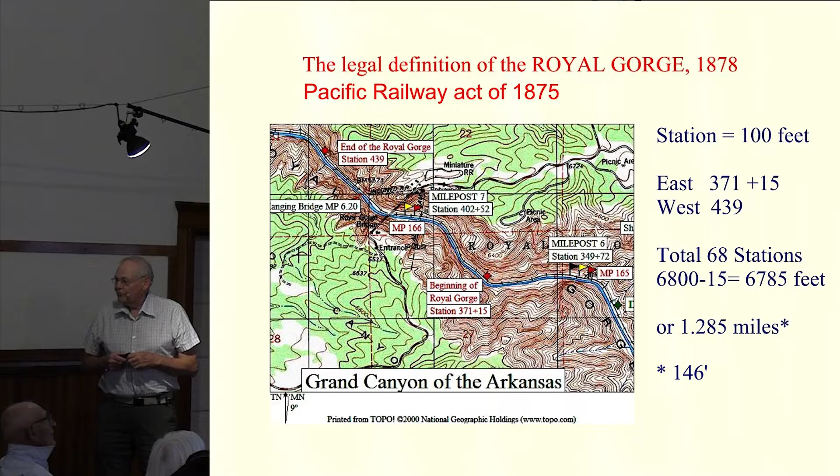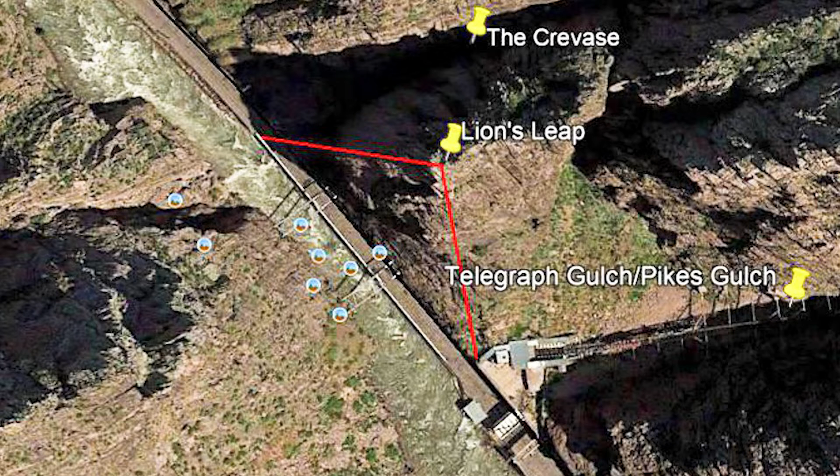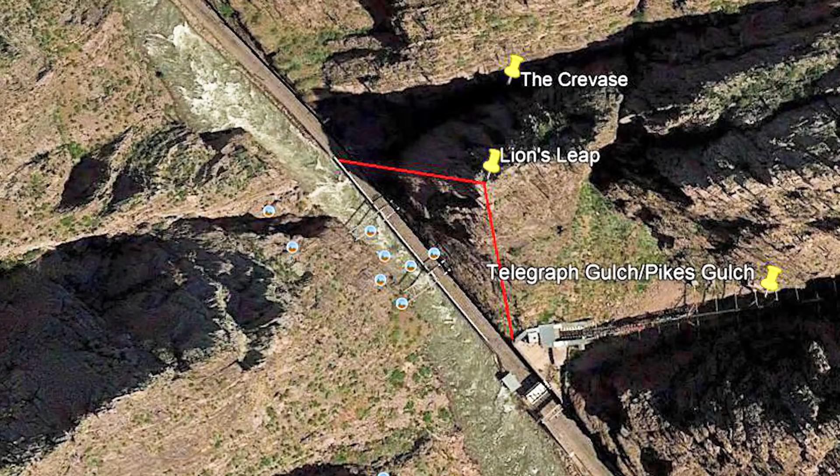An overhead view looking straight down. We're going to look at a section that's about 300 feet long. On the east side, or downstream side, is what everyone called Telegraph Gulch, but I understand now everybody's pushing to use it as Pike's Gulch because apparently he climbed up out of the canyon at that location. On the west end is the crevasse, or Bigler's Gulch, which we'll take a look at here. In between, the high point, which is about 500 feet above river level, is called Lion's Leap. This is Lion's Leap looking from the ground up.

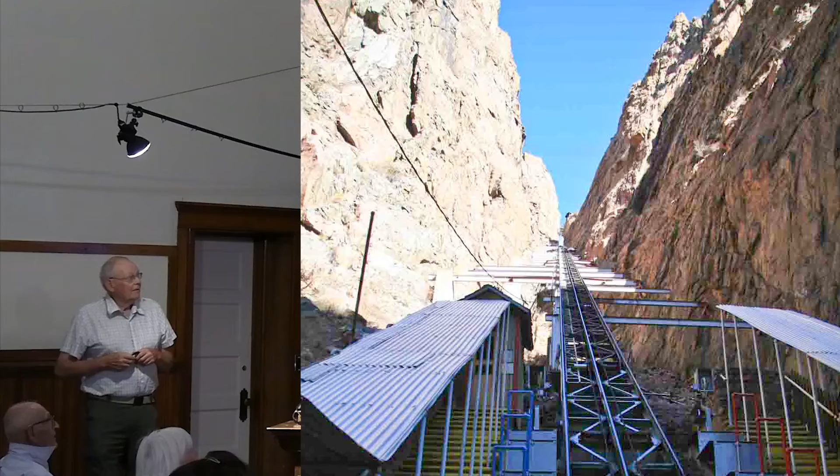Here's what Telegraph Gulch looked like before the fire, with the funicular railroad that was there. That, of course, was the easiest way to get to the hanging bridge. Of course, now it's not possible to do that. This is Bigler's Gulch on the west side. It is actually a natural fault line that runs through the area.

This is what that section looked like in 1879. At that time, it was possible to get into the east end of the canyon and the west end of the canyon, but you couldn't pass through because of this rock formation in the middle. There was one time of the year the passage was possible - that was in the winter. You could walk across the ice if you were brave.

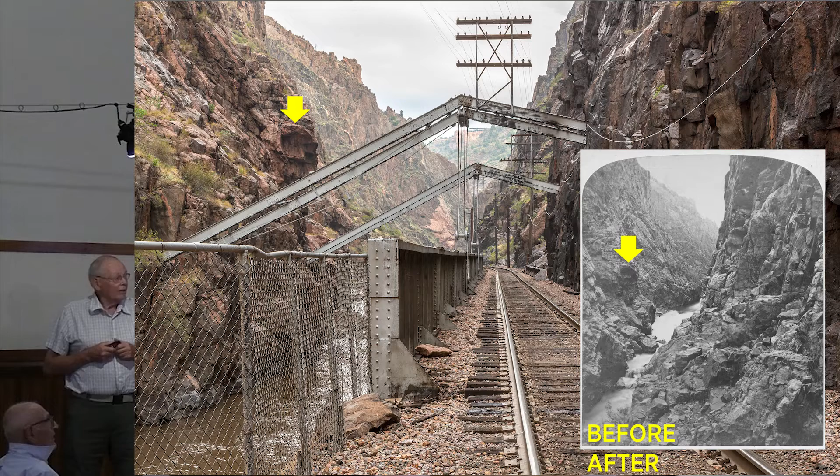And this is an image that Eve put together that I'm sharing with you. You can see the two comparison points of where the rail line is today and where the rock was in the past.

In the winter of 1878, a number of individuals made their way into the gorge to take a look at it. We know that one of them was A.A. Robinson, the chief engineer of the Santa Fe Railroad. Another was C. Shaler Smith, a very noted bridge designer and contractor at the time. We believe Chalmers Talbot also accompanied them and took stereo photographs of the trip.

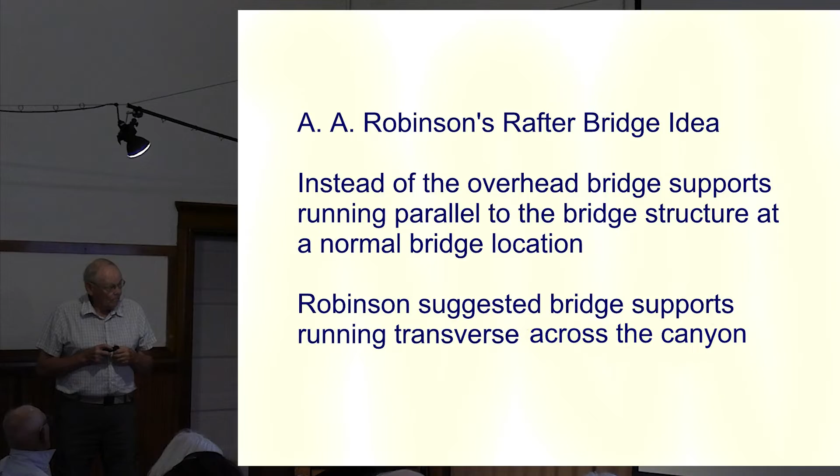Smith took Robinson's ideas, returned to his office in St. Louis, and worked up the plans for a rafter bridge. They were submitted to Robinson, who enthusiastically accepted the plans and offered what is known as a turnkey contract for the bridge. A turnkey contract includes fabrication, delivery of the materials, erection of the bridge, the labor to put it together, and the inspection when the bridge is done, to be turned over to the company.

Now, one might ask, why didn't the Santa Fe engineers work on this bridge? The answer is quite simple: this is the first iron bridge ever built on the Santa Fe Railroad. None of the very qualified men Robinson had working for him had any experience working with iron. All the bridges between Topeka, Kansas and Pueblo, Colorado were wooden trestles. So they went to an expert.

This is an example of Smith's work on the right-hand side. He designed some spectacular bridges, and there are a couple locally you can still go see. The Spider Bridge on Glorieta Pass is a long walk to get to, but the Cascade and Lobato trestles on the Cumbres and Toltec are easy to go see, and he was responsible for them. Smith also designed bridges in Australia and Peru. He's better known than we know him, I guess is what it comes down to.

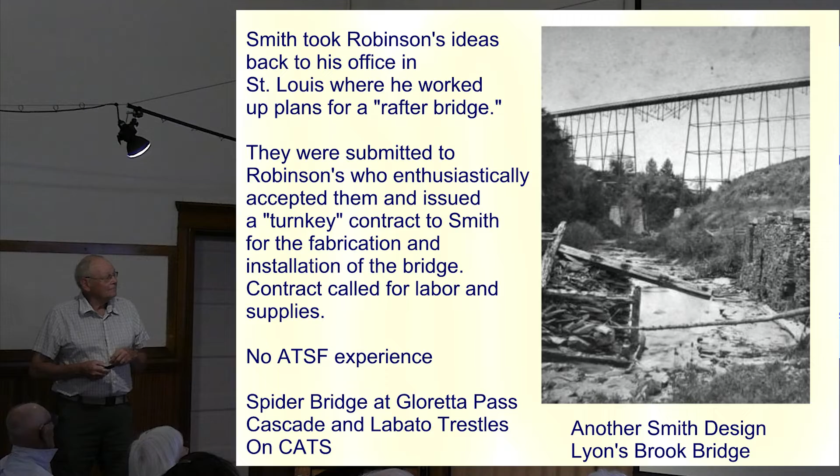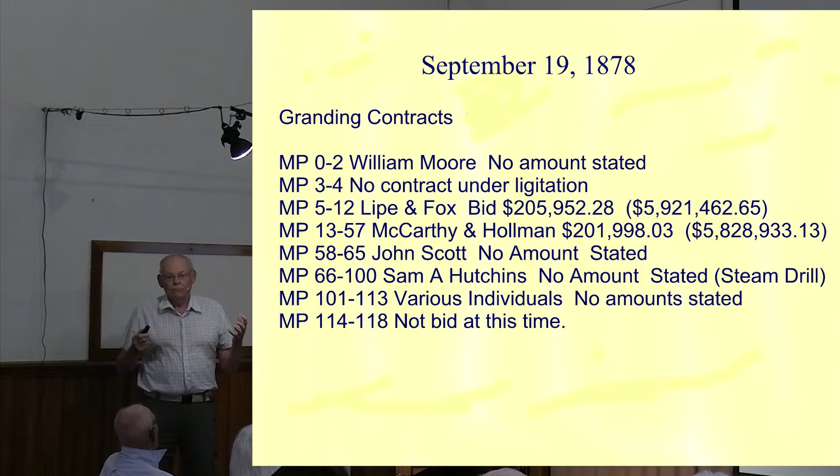One other individual we ought to mention is Sam A. Hutchins. Sam Hutchins was a contractor for the Denver and Rio Grande, and when the Santa Fe leased the Rio Grande, all of the Rio Grande contractors were thrown out of work. So the Santa Fe tried to offer them substitute work, trying to take some of the sting out of the lease. Sam Hutchins was the individual who brought a steam drill to the Royal Gorge to try it out. But apparently it was never very successful, because we only have one or two pictures of it, and then it disappears from the scene.

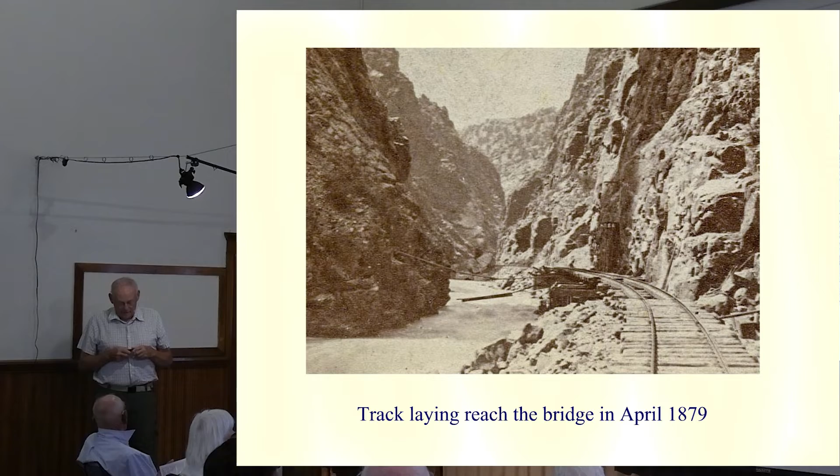A little bit later on, they've installed a gallows head frame kind of crane that they can use to lift things up and move them across the river. They've also put much more substantial timber in on the walkways to go across. This allowed the engineers to get in and get extremely accurate measurements for the various pieces of the bridge they were fabricating, and it also gave them the opportunity to prepare the pad sites where the bridge foundations would sit.

One thing I should mention to you, and I should have mentioned earlier, is that we look at these pictures and they don't match what the railroad looks like today. Since the railroad was completed through the gorge, the Rio Grande has probably rebuilt the line 4 or 5 times, and many of the curves have been shortened and many of the tangent lines, the straight lines, have been lengthened. So a lot more rock has been removed than what appears at this time. This basically, if you look at it, is just a shelf that they've blasted out.

This is looking downstream, gives you a little bit better idea. You'll notice on the left-hand side at the bottom, there's a small masonry wall that sticks out. This was put in to divert the river away from the bridge abutments.

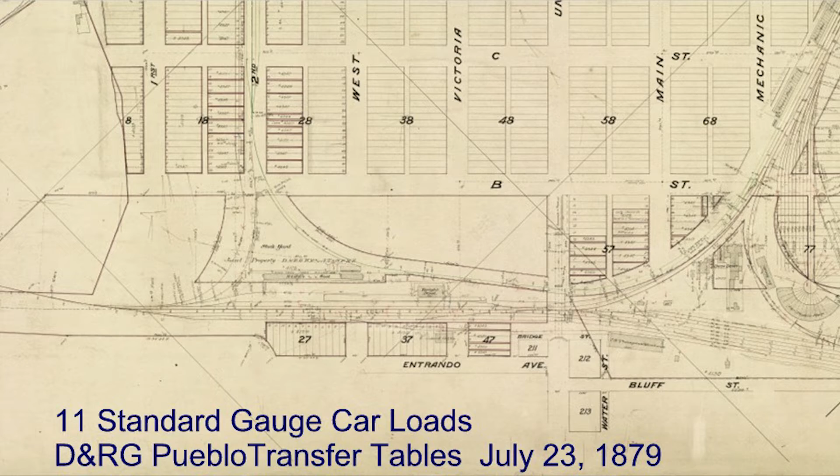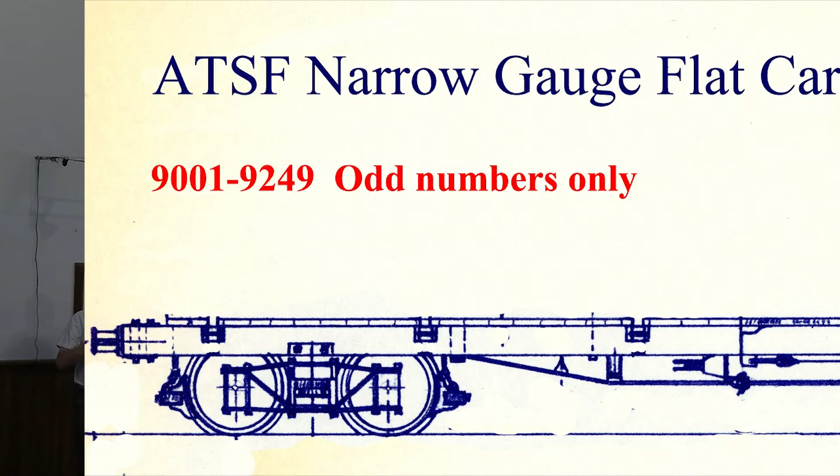We're not exactly sure how many carloads of narrow gauge equipment it took, but that was one of the factors that C. Shaler Smith had to take into account. The railroad between Pueblo and Cañon City was narrow gauge. The bridges were listed at 30,000 pounds capacity, which also matched the cars, so the biggest piece you could transport on the narrow gauge was 15 tons.

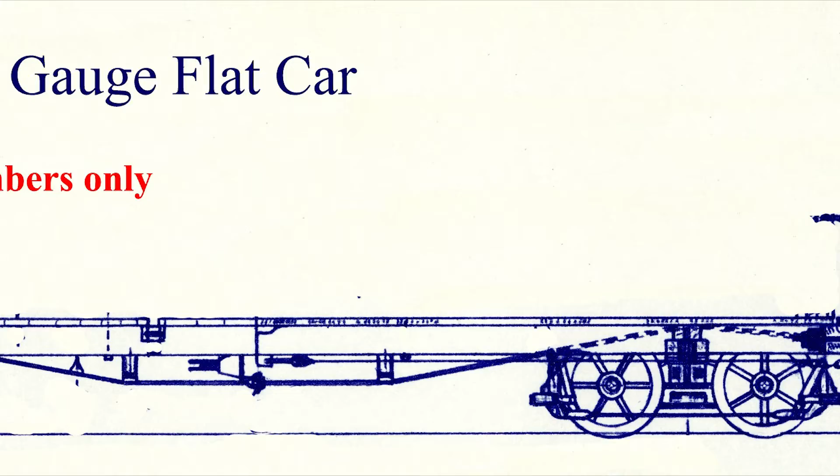We know that the bridge made its way west. We don't know how many cars it took. It ended up at the materials yard here in Cañon City. A materials yard on the railroad is their version of Lowe's. Anything you can think of that you need to build a railroad is stored at the materials yard and can be readily loaded on cars and forwarded to the front.

I know that at the materials yard in Cañon City, the materials for a depot at what is today Salida were available, and a depot for what they call Cottonwood Buena Vista were available, and materials for a depot at Leadville were on hand. Windows, door sashes, doorknobs, hinges, nails, paint, tar paper, anything you can think of was all there.

Anyway, when the bridge got to Cañon City, we're fairly sure that the large pieces were left on flat cars because it didn't make sense unloading them. But the smaller pieces probably were sorted out, laid on the ground, and prepped for delivery to the bridge site.

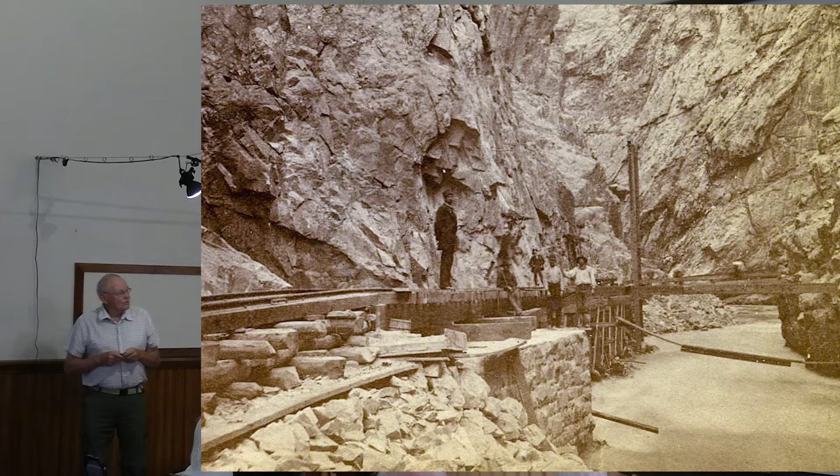At the bridge site itself, the track, which had to be kept in service because the Santa Fe wanted to make sure they had a continuous piece of track they could claim when they were going to sell it, was jacked up on timbers to allow more space for the bridge to be inserted underneath it. You can see the H-frame crane they erected on one side, which they moved from underneath each of the overhead rafter systems, and used to jack up pieces.

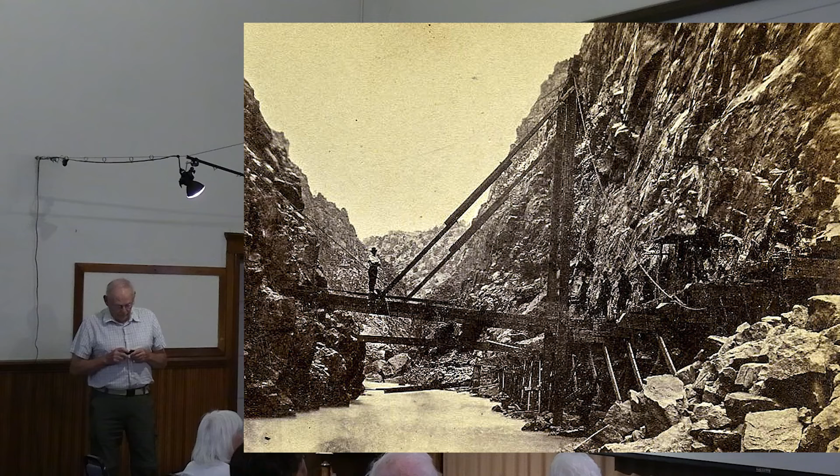This is another view of the same site, taken from the east. You can see some fairly significant timbers have been put in place across the river. If you're unfamiliar, in locations it's anywhere from 30 to 40 feet across here. Those are big pieces of lumber.

The first part of the bridge to be installed were the pedestal pads. They're basically steel, iron plates—I'll correct myself because this is an iron bridge. The iron plates were placed against the rock wall, holes were drilled, bolts were inserted into the holes, and then hot lead was poured into the hole to solidify the bolts so they could never be pulled out. Then the plates were established and secured with double nuts.

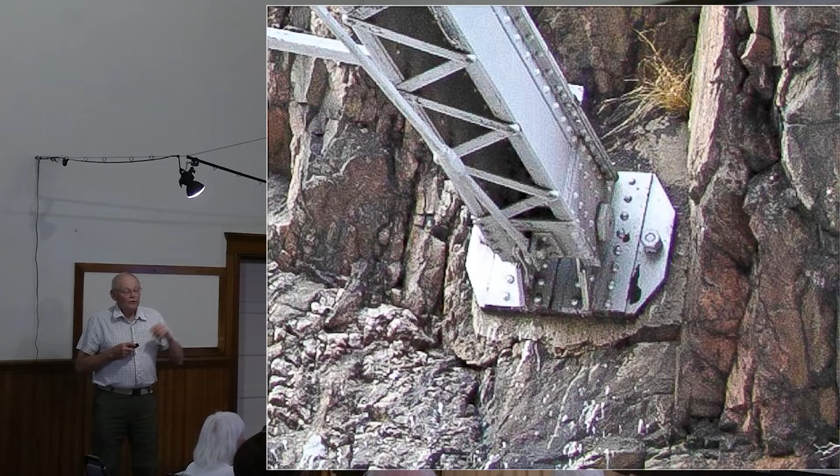The connection between the rafter and beam is a large steel pin—large iron pin. This kind of bridge is very common; these kinds of connections were built in the United States. C. Shaler Smith actually had a patent on these, so he had a lot of parts that we don't really know about.

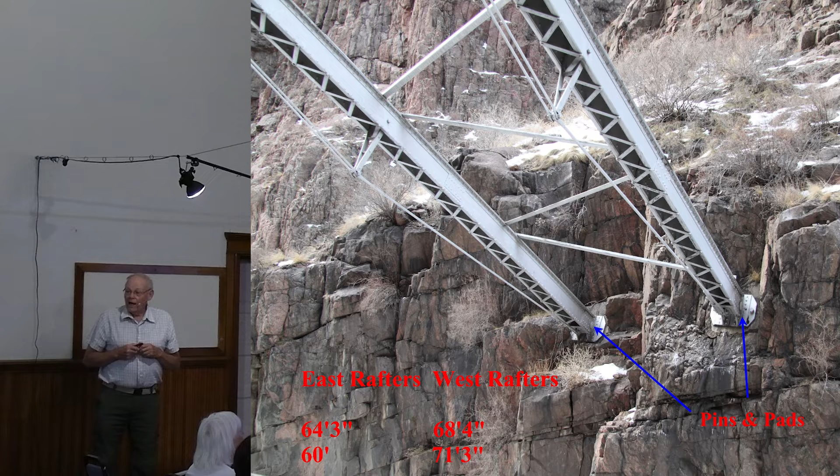The riverside—and I refer to it as the riverside and the rock side instead of north and south because I get myself confused—the riverside rafters are all different dimensions; none of them are the same size. The rock side rafters, which I've never been able to get to measure, are, I believe, all the same size. As you can see, they range from 60 feet long to 71 feet 3 inches. They tend to be so long that they twist if they aren't supported.

And you can see that the rafters are interconnected by a series of braces that run on a diagonal across.

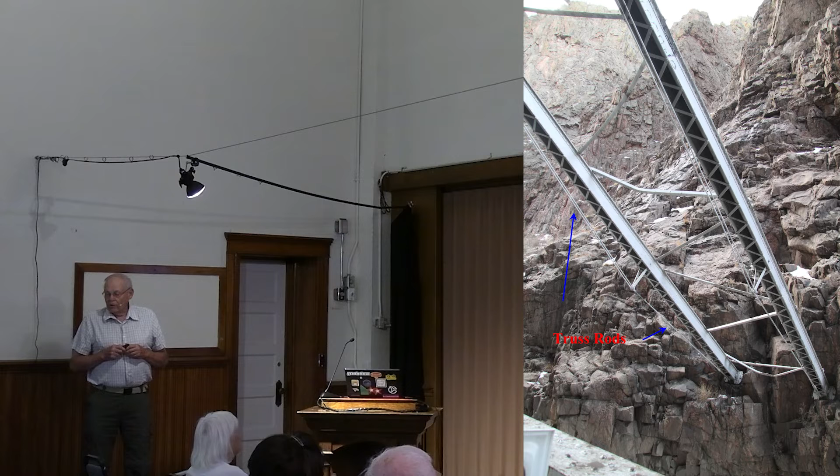In order to strengthen the rafters on the riverside, there are a series of truss rods that run along the bottom of the rafters to provide tension. From what we understand, these were laying flat on the ground and they were lifted up by the gantry crane that they'd built, the wooden gantry crane. They probably were supported with cribbing.

The whole rafter system is like an arch. The last pieces at the very top are what hold it in place and provide the steadiness so that it doesn't move.

The very top of the rafter system is exceedingly unique. If you look carefully up here, you can see that at the top we have a metal piece that goes up and loops over one of the iron pins, then comes down and is connected to the cross member with another set of iron pins, which is connected to the links that drop down to the deck to support the bridge. You have all this stuff hanging in the air until you get all these pins in.

So 1, 2, 3, 4 pins have to be in place. These are massive pins. They're over 5 inches in diameter.

You'll also notice a few places where these X-braces that go across have been hit by falling rock and they've been dented. In some places, they've actually been knocked off.

This is a cross-section of what one of the beams looks like. You could go to a local metal store, a metal supplier, and buy all the pieces to build this bridge. The hard part to come by would be the 7 feet high, 30 feet long, 3/8 of an inch steel plate that makes up the big girders. But everything else is very common.

The top is a 16-inch steel plate, a 1/2 inch thick. The sides are 15 inches by a 1/2 inch. The only difference is the bottom of the rafter beams are open. This allows the water and everything to come out of the bottom so that you don't have a rust issue. The bottom also is a series of lattices that go back and forth.

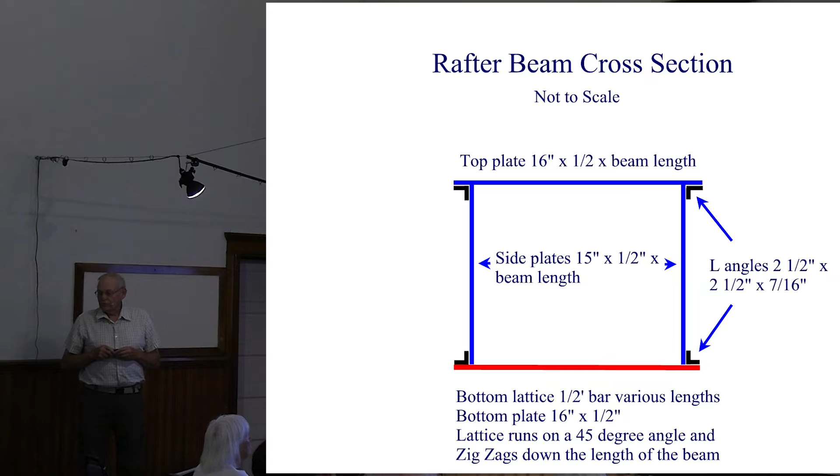Lattice beams are not that unusual. Most bridges before 1920 used a lattice.

The bridge itself actually sets on iron cylinders, and the iron cylinders are still there. You just have to know where to look to see them. There's one under the west abutment. There's another one here. There are two more on the short span on the other side.

So the first thing set in place before the beam was put up were the installation of the iron cylinders. They sat on bedrock on the bottom. Today they're filled with concrete, but I think originally they were left open, which seems rather strange.

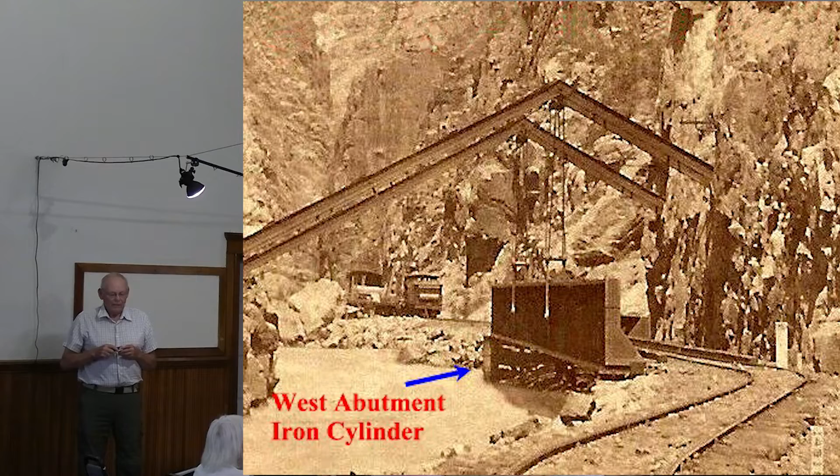This is what one of the cylinders looks like. Sitting on top here is a thrust washer, a thrust bearing. It's two steel plates that are allowed to slide on each other so that you can have expansion and contraction.

And this is another one of the thrust bearings. This one has grooves cut in it. I guess it's kind of to hold it in place. This is the one at the south end of the short, or the rock girder.

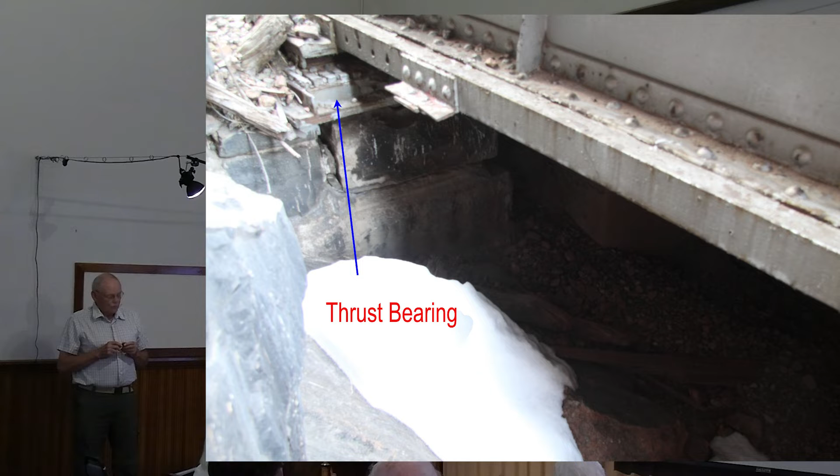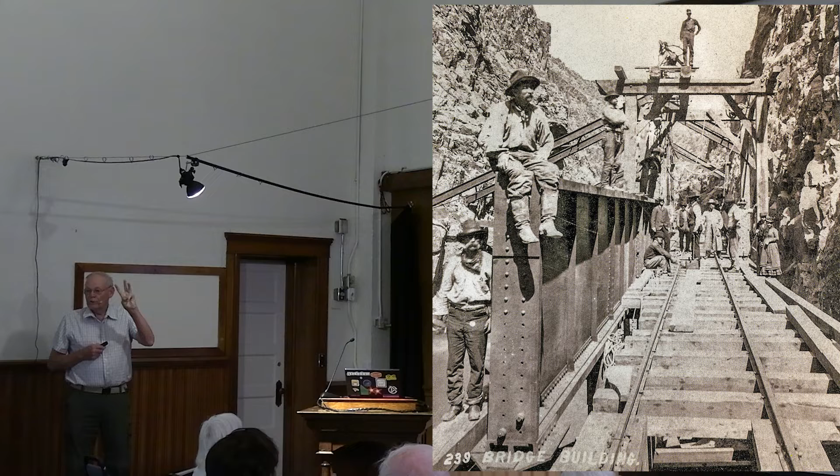This series of pictures is some of my favorites because Joseph Collier shot them. This is a picture taken while the bridge was being built. The bridge is actually three bridges, three separate bridges which are connected underneath of the sets of rafters.

This gentleman is sitting on the very east end of the bridge. You can see that part of the rivets are missing; they haven't been put in yet. These are iron drifts that are used to hold it in place until they can get the riveter in there.

If you're not familiar with riveting, a rivet is placed in a furnace and heated up till it's red hot. It looks like a stove bolt with no threads on one end. It's stuck into the hole, and one guy on one side holds a metal piece to hold it in place, usually shaped like a hub. The guy on the other side has a hammer, and he's whacking away on this red hot metal until he rounds it out and seals it tight. Bridge engineers will tell you that rivets work as well as nuts and bolts, maybe even better.

In the distance you can see this device, called a traveler. It's basically just a box frame, and on top of it is a trolley system with winches. A railroad car will be brought in with a piece of the bridge on it. They'll reach down with these large ropes that you can see dangling down, latch onto the piece of iron, lift it up into the air. They can move it lengthwise and sideways to get it in position, then drop it down, and rivet the two pieces together.

Eve loves this picture, and I think she's correct. We believe that the gentleman straddling the rail here is C. Shaler Smith. Must have been a special occasion because we have ladies and kids on the bridge, which you probably otherwise would not have had. Again, you can see some of the apparatus hanging down that's used to lift the iron girders up.

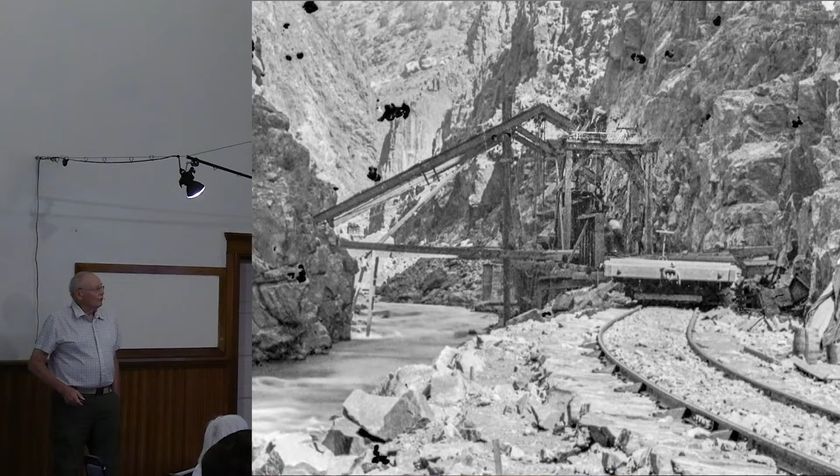And another picture that shows part of the bridge being inserted. You can see our traveler box frame. From what I can see in that picture, they're still working on the 3rd part of the first bridge.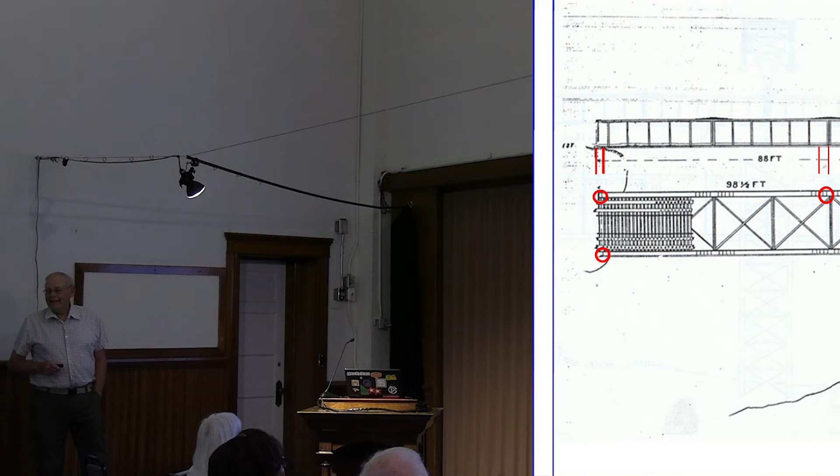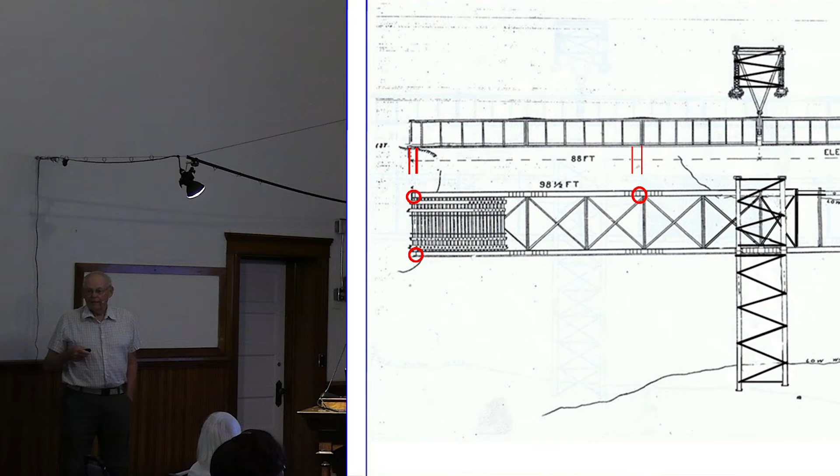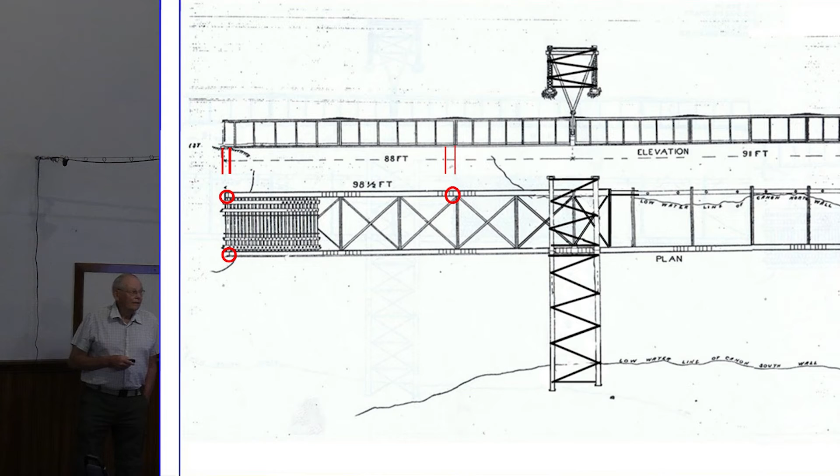Finding plans of the hanging bridge is like finding hen's teeth. When the Rio Grande and Southern Pacific merged, the plans stayed in Denver, but when the Union Pacific bought Southern Pacific, all of the Rio Grande plans went to Omaha. So you call Omaha and ask the museum there, do you have the plans to the Royal Gorge Bridge, to the hanging bridge? And their answer: oh no, we sent them to the museum in Greeley. My response is, there is no museum in Greeley. So you contact the people in Golden, where the Colorado Railroad Museum is - we don't know where they're at, sadly.

This set of plans came out of the American Society of Civil Engineers drawings, and I'll tell you they were not as complete as they are now, because I've added to them. I've put a lot of the details into the bridge. The red circles are the location of the iron cylinders.

The east section of the bridge - you have to give a little bit of fudge room because it's difficult to get your hand into some of the spaces to get an accurate measurement. But it measures about 93 feet 3 inches.

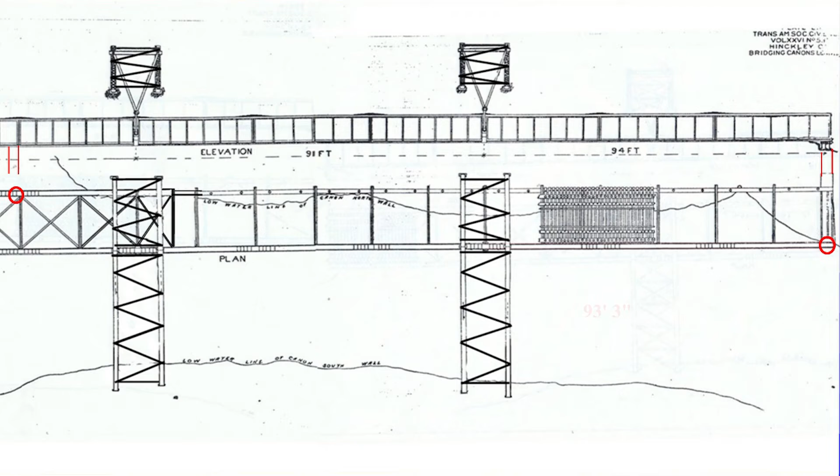It is a side hill bridge. The river side of the bridge is a truss girder, a through plate girder. But the rock side of the bridge sets on a rock ledge, so I guess you'd call it kind of a half bridge.

The center section of the bridge is 91 foot 8 on the outside, but on the rock side it is shorter because this section of bridge sticks back in past. So you have this side hill bridge and a little tiny chunk of a regular bridge on the other end.

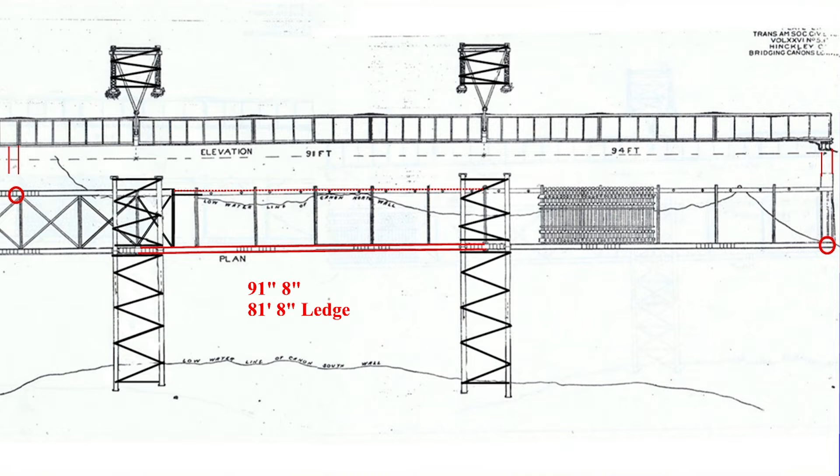And this line that wanders around in here is where the water can get to, or could get to, in the past. The west section of the bridge is a little bit shorter. On the river side, it's only 89 foot 1 inch long, but on the rock side, and it's a true bridge, it is 99 feet long.

So you have this kind of an offset bridge, which is really screwy. But apparently they built the bridge to fit the site instead of building the site to fit the bridge.

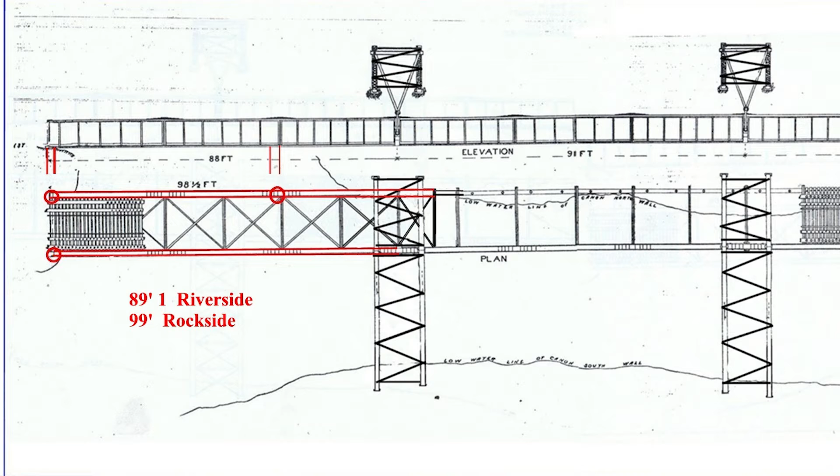In order to anchor the bridge to the rock wall, they used a series of bridge beams that are non-weight bearing. Basically, they're just a piece of iron that runs underneath, connected to the through plate girder out here in the air, and it runs over to the rock. Then there's a big iron pin drilled into the rock wall, driven in and leaded in so it can't come out. This basically is the spacer that holds the bridge relatively straight.

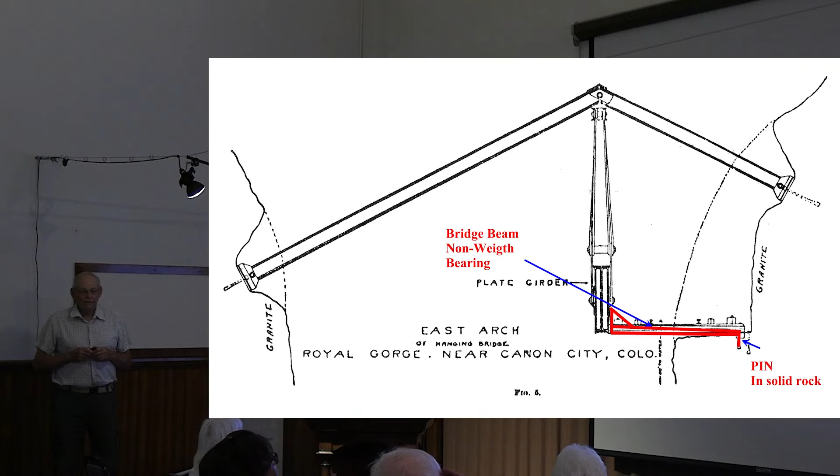I don't think the bridge was ever purely straight, even when it was built - it just had little wiggles in it all the way down. This is the top of that connection, that little triangular piece right there.

Today you could go to a metal supply store. You might stretch to have to buy that, but you can buy it. Vestas Wind Products down in Pueblo has train loads of this stuff come through every day to go out to build their towers.

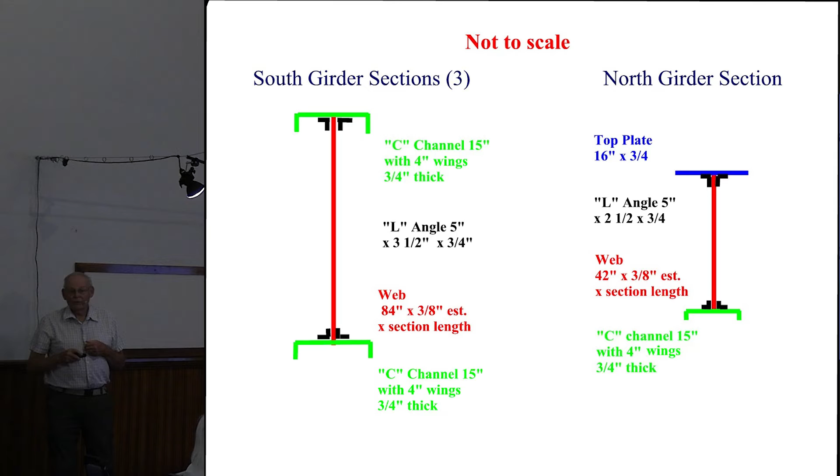This is what each of the panels looks like. Scattered about every 5 feet along the panel are these stiffeners that stiffen that plate up a little bit. We have the C-channel on top, C-channel on the bottom.

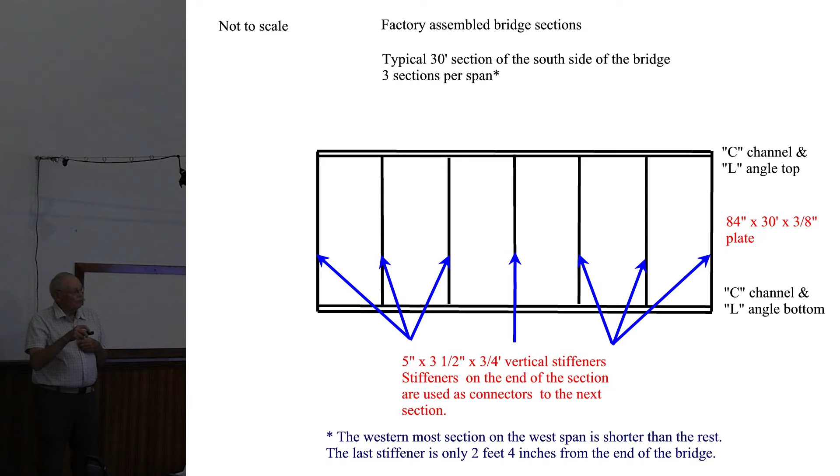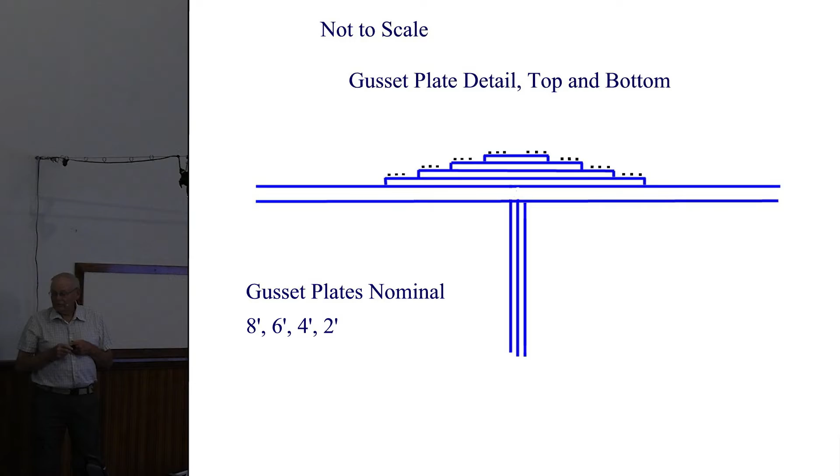This is what the gusset plates look like on nominal dimensions. They are 8, 6, 4, and 2 feet, and the rivets go completely through all the plates as the stacks go up. And in real life, they look like this.

You can see the top plates up here, and there's also a set upside down here. You'll notice this is one of the stiffeners. This is a joint between bridge sections where you have two stiffeners who are riveted together.

Anybody play with erector sets?

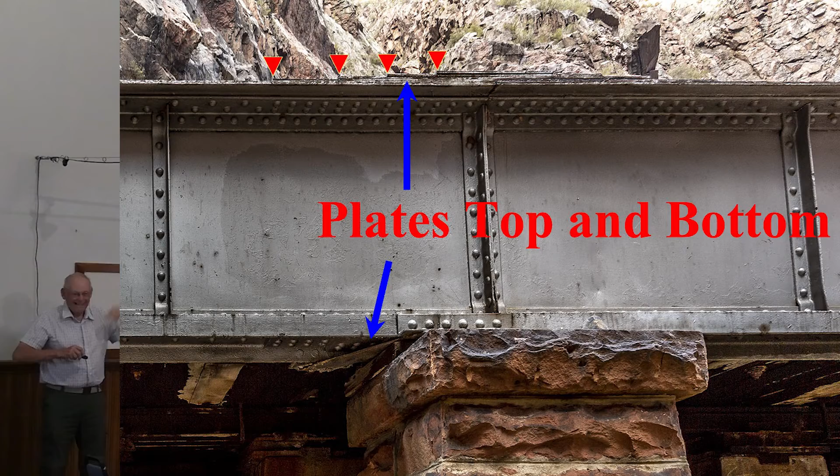This is a more detailed picture of what the truss system looks like. The gentleman at the bottom of the picture, I don't know if any of you knew Mark Widener. He was an engineer for the Rock and Rail Railroad, and unfortunately we lost him about a year ago to a very aggressive form of brain cancer. But he was our guide that day, just quite the gentleman. Anyway, you can see that we have the bottom links.

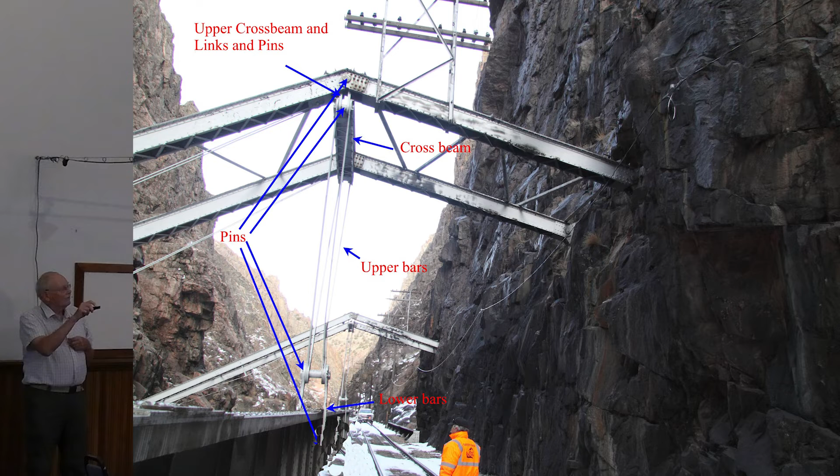These big iron bolts going through, the top links going all the way up back again, the cross beam that goes across and all the various pieces.

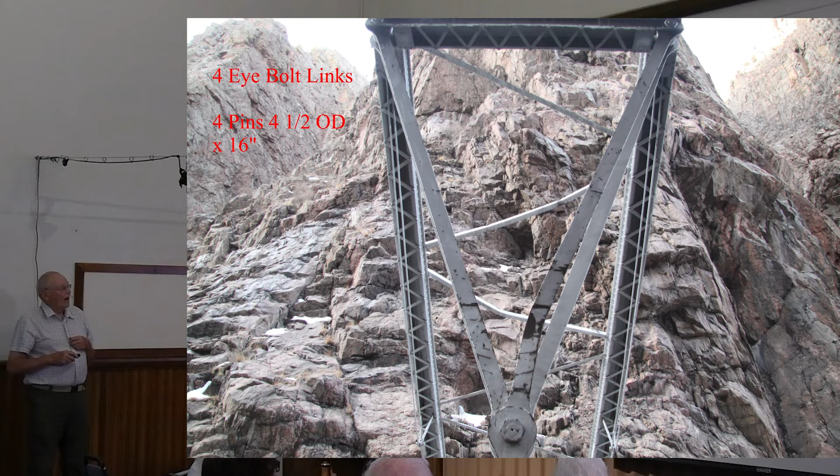This is another look at the upper eye links. And yes, that's a ding where the train car hit it. The bridge got hit a number of times, shifted loads.

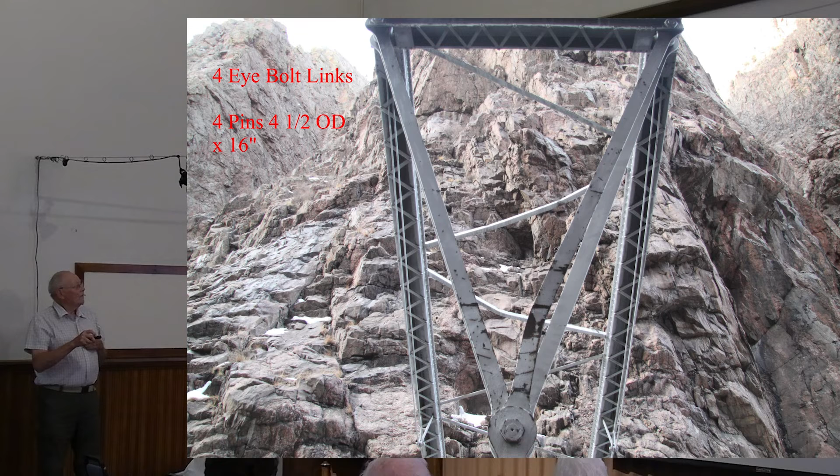The pins in here are 4.5 inches OD, 16 inches long. And the bottom ones are 5 5/16 OD and 16 inches long. This is a close-up of one, taken from the train.

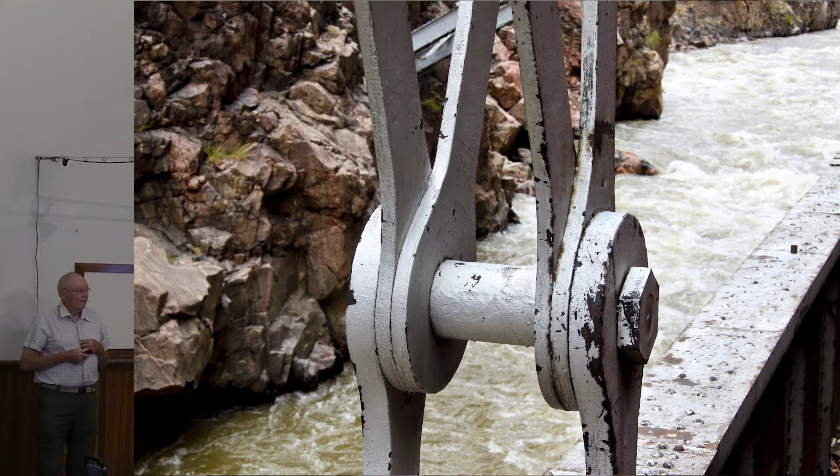Surprisingly, the outside is threaded over here, and that's a big nut that holds it all together. The bridge is built to have quite a bit of movement in it, lateral and up and down, which I find rather interesting. That's probably why it survived when the things get hit.

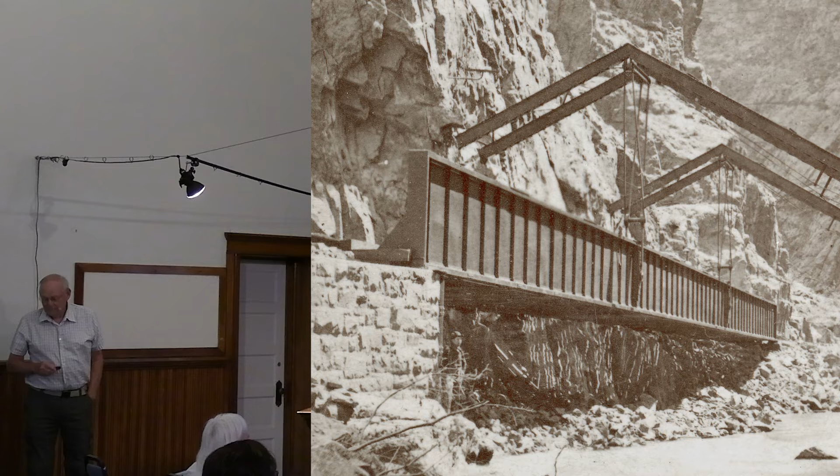As built, the bridge had an open deck. Sunlight shines through. This is a William Henry Jackson image. You can always tell Jackson's images - you know how? There's always a person in there. He liked to put people in his pictures for scale, which I thought was interesting.

By open deck, it means that the spacing between the ties was open. You could look straight through down. And I believe that probably that was a design idea - that when you have high water, the water could run through and around the bridge and wouldn't do any damage. To some degree, that was okay, but to other degrees, it didn't work well.

We're kind of going to jump back and forth here on timelines. In 1888, the third rail was added to the route, making it possible for the bridge to be used for standard gauge equipment. Actually, the bridge was designed for standard gauge equipment. The Santa Fe originally planned to build from Cañon City to Leadville as a standard gauge railroad, but when the Santa Fe leased the Rio Grande during December of 1878, there was a stipulation in the lease that anything that was a natural extension of the Rio Grande had to be built narrow gauge, so they just converted over to narrow gauge. We know that because in the materials yard here at Cañon City, there were piles of standard gauge switches and rail braces and equipment that later on was hauled off and used elsewhere.

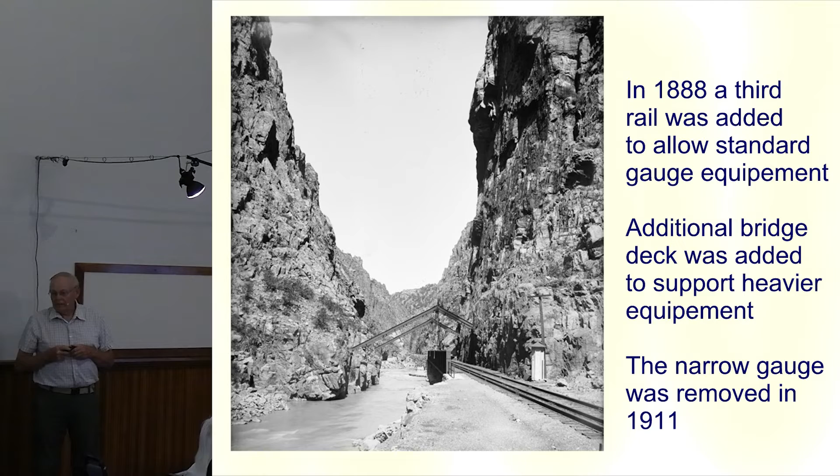The narrow gauge was removed in 1911. At that time, when the standard gauge equipment came in, they began to add additional reinforcement to the bridge because by standards it was kind of lightly constructed by this time. After 10 years, the weight of the locomotives and cars had gotten much heavier. So I suspect they put more timber in the bridge, and I believe that they added a stone pier at that time - that was on the rock side in the middle.

Other famous events: 1947, the west end of the bridge caught on fire. The Royal Gorge people noticed it, notified the railroad. The railroad rushed a flat car and a locomotive from Cañon City, borrowed a fire engine, put it up on the flat car, hauled it off, got out to the fire. There was no water in the fire engine, so they had to back up, set up a siphon, fill the tank. They eventually got the fire put out.

But the end result was the railroad decided to put a ballast deck in to reduce the fire hazard. Basically, they filled in all the spaces on the floor so that it was tight, poured ballast over the top, and then lifted the track up and reballasted back underneath it. It did have an effect, though, that was important, and that is it reduced the dimension between the bottom of the rafter system and the top of the rail.

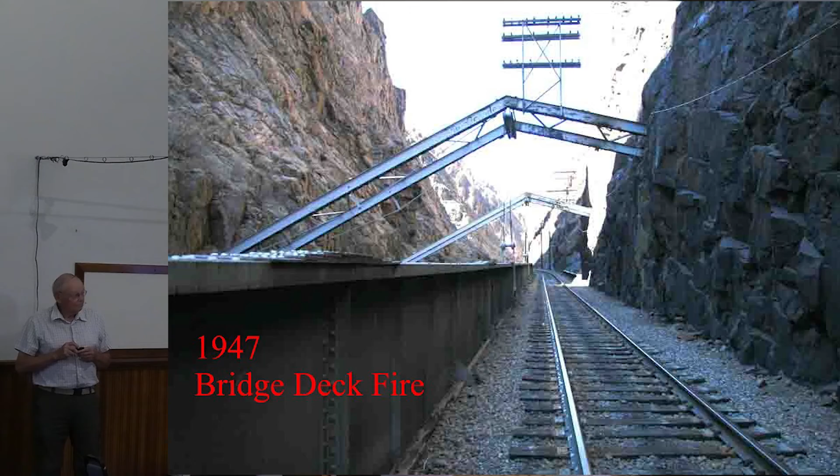From 1879 to 1900, the bridge was hit by a number of different flash floods, and there were large deposits of debris. On one occasion, Eve shared a picture with me showing a huge mass of material piled up on the bridge that had actually sprung the bridge out about 2 feet off of center.

You would think, oh, that's the end of it. But the solution was they put a big brace between the rock wall and the through plate girder, removed all the debris, knocked the brace out, and the bridge popped back where it belonged. I wondered about that, so I asked a good friend who is the principal bridge engineer at the Transportation Technology Center in Pueblo if that was unusual. He said a good bridge is designed to do that—it will spring back into its shape if it's allowed to.

Up to 1900, they tried a number of things here. They tried a couple of masonry walls, but the river got to each one of them. Finally, in 1901, they decided on a final solution.

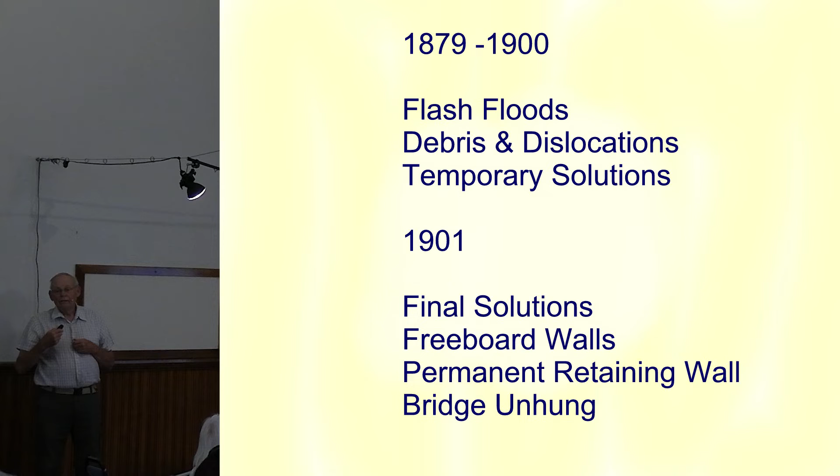They started by building freeboard walls, which is a naval term—freeboard being the amount of space from the level of the water to the top of the wall. Starting up the canyon from the bridge, they built a series of masonry and concrete walls raising the side of the right-of-way, and they put that big fancy iron fence on top of it.

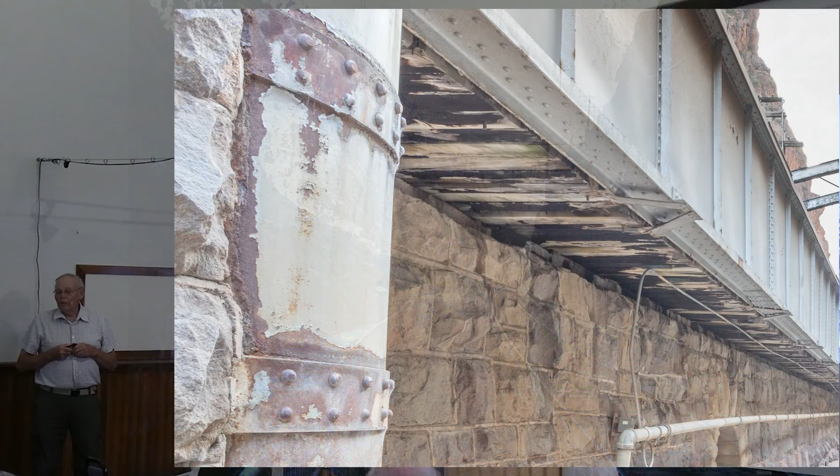The rock wall basically gives the river a more direct channel to follow, kind of forcing it to go. At the same time, they built a massive rock wall underneath the bridge. The rock wall at the bottom is about 6 feet deep, and the center of the wall at the top is directly under the riverside rail. Across the top is what they call a concrete batten, and the bridge sets down on top of that.

So in 1901, the bridge came unhung, and it still is unhung. It looks like this on the inside. I'm not sure when these concrete piers went in, but I assume it was after the masonry wall. The reason is that in 1901 structural concrete wasn't a big thing, and these appear to be somewhat later in issue.

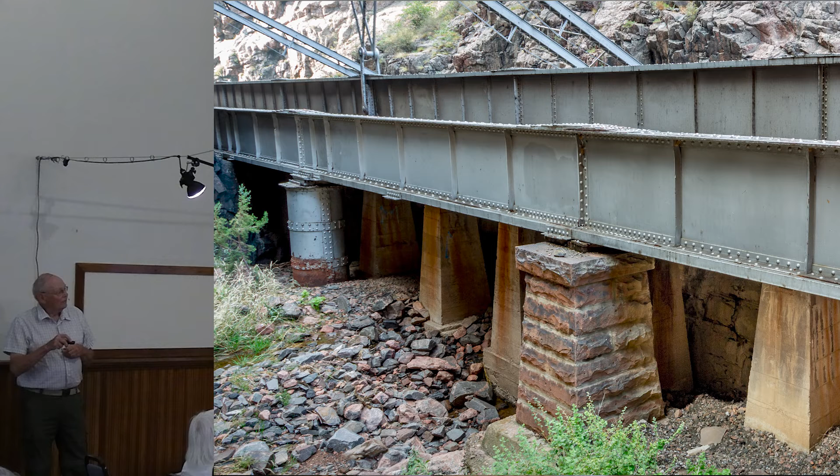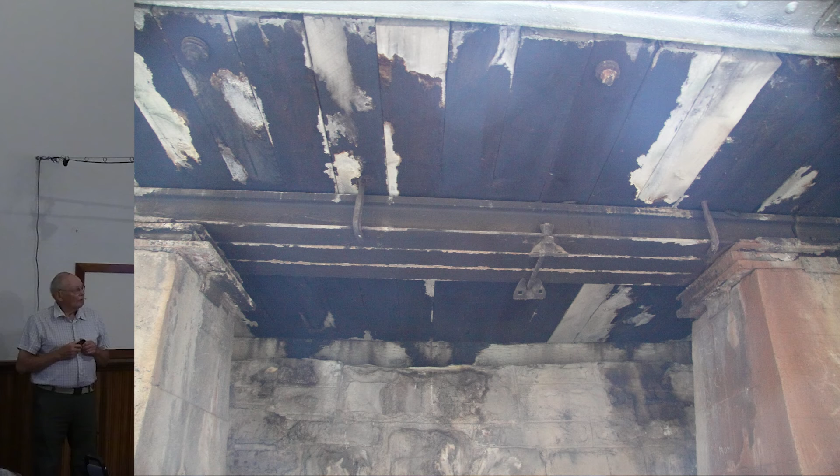If you look, you can see these concrete piers staggered along, basically underneath the rock side rail. On top of these concrete piers are 3 pieces of railroad rail being used as I-beams, tucked underneath the deck. So now the outside rail and the inside rail are setting on solid foundations, and they are that way today.

In order to drain Bigler Gulch, they included a culvert, which you can actually walk through to get out to the riverside—there's a ledge on the riverside you can walk along. This drains rainwater coming down Bigler Gulch. It also provides equalization: during high water, water is allowed to back up through that culvert and equalize the pressure on both sides of the walls on the inside.

This masonry pier is the one that I think was added about the time the standard gauge was installed.

Yes, the bridge gets hit. In 1961, a new tri-level auto rack smacked into the truss system on the rock side, and you can see it did quite a bit of damage. But since the bridge is no longer hanging, the rafter really doesn't serve a great deal of purpose. That's not quite true, though—Roger Barris, currently with the FRA, was the last Rio Grande Bridge engineer, and he believes that when a train passes over the bridge, the iron part of the bridge actually carries 10 to 15% of the live load even today. In 1917, the Interstate Commerce Commission called the iron bridge a delightful ornamental iron handrail.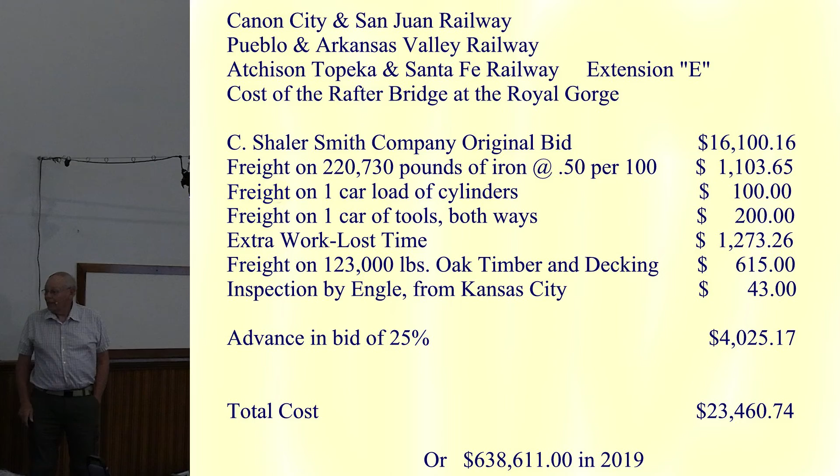Was there ever any idea that they'd have to change it? The bridge wasn't sagging? No, for that reason they didn't have any adjustment, turnbuckle or anything. There was no inclusion for that, but I have to tell you that around 1904 there was serious consideration of building a second main line through on the south side of the river. It would have bypassed the hanging bridge site with a tunnel. So there are other considerations in there. I'm not sure exactly why they changed their mind and didn't go ahead and build it.

They and the city had reached an agreement over the water line that was in construction at the time. Is that the right year, Eve? It was completed around 1909. But there was really strong consideration.

You have to realize that up until 1936, all the traffic on the Rio Grande between Denver and Salt Lake City went through Canon City. This was the main line. There was no Moffat Tunnel, there was no route west, and so the Rio Grande was very protective of this route. In the early years there were alternatives - you could use the Colorado Midland from Buena Vista to get to Colorado Springs and bypass the gorge. But after 1920, the Midland was abandoned, so without this line, they were dead in the water.